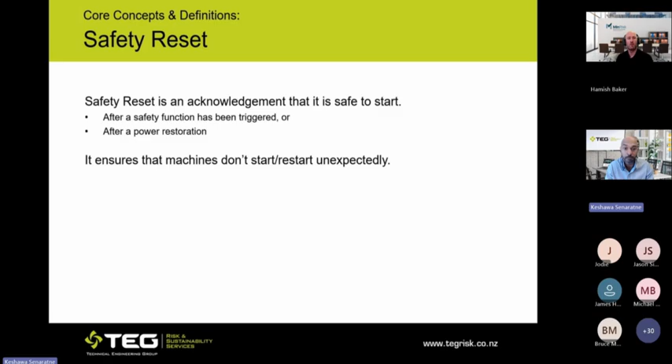In terms of unexpected restart, AS/NZS 4024.1603, which is the ISO 14118 on prevention of unexpected restarts, or unexpected startups actually, talks about definitions and key considerations. If I were to highlight this: unexpected or unintended startup, as per the standard, is startup which, because of its unexpected nature, generates a risk to persons.

It can be a start command that results from a failure, an unintended start command, or even external influences such as gravity, load holding, failure of load holding, and so forth. It does not mean automatic cycling as part of a process function. That's intended, that's considered normal operation. We're purely discussing restart after a safety function or a hazardous situation or a power restoration.

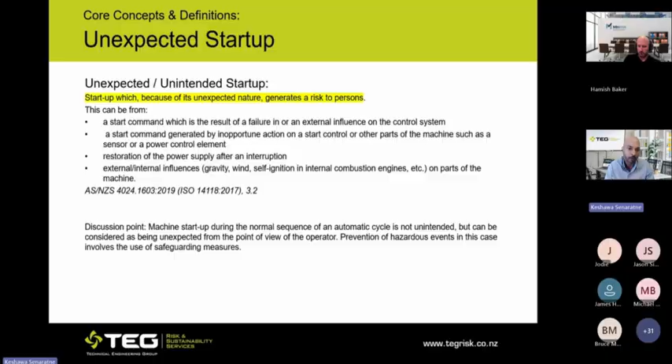So if we go further into this topic, then the unintended start command or maintained stop command both come into play. It's not purely on things starting to move. Prevention of unexpected startups could be looked at in these lights, and this is just bringing some awareness for consideration.

And probably one thing I'd say is it's quite a technical topic, and Casey and I had a bit of discussion around whether we could actually fit this into one webinar. There's going to be a balance between those that are technical, designing these things, who might be diving deeper into these standards, and others, perhaps in health and safety manager roles, where we'll just draw your attention to more systemic, high-level things. There'll be a lot of references here, and you'll get a copy of the presentation afterwards to do a deeper dive into some of these clauses.

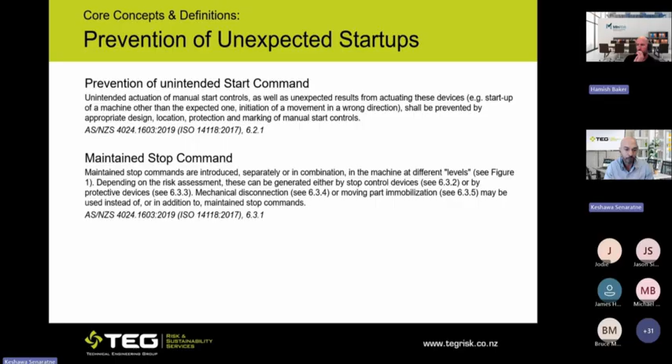Yeah. Thanks, Hamish. So hence I won't go into all of this. You're able to read through them in the presentation. Start interlock and restart interlock are less commonly brought up topics. They come out of the ESPE standards, electrosensitive protective equipment standards. It's basically talking about machine start and automatic restart, so the controls that need to be in place to prevent exposure to hazardous situations.

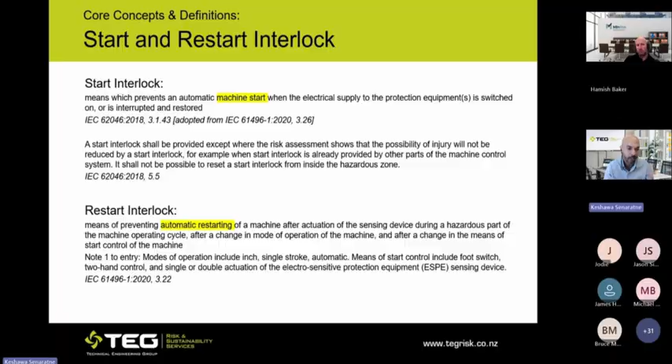And that earlier comment I made, those IEC references that Casey has given relate to electrosensitive protective equipment. It's getting right down to the weeds, so it's probably a more technical reference for some of our machine builders and designers to look into. Yep. And as Hamish said, this is building up a broader picture of what you may need to consider when you're preventing unexpected startups or designing equipment to achieve that.

Manual resets, coming out of ISO 13849. This is the exact clause from the standard. It first talks about re-establishment of the safety function by resetting the safety guard that cancels the stop command. That's inferring that reset is intended to cancel the stop command if indicated by the risk assessment, which I will go into in more detail later. This cancellation of the stop command shall be confirmed by a manual, separate and intended action, which is a manual reset.

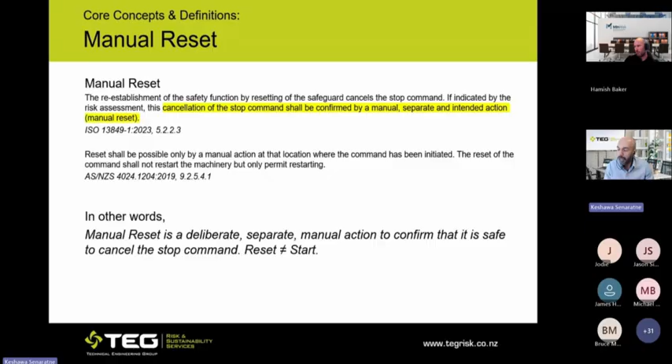And I've pulled in some reference from 4024.1204, which is the IEC 60204-1 equivalent. Reset shall be possible only by a manual action at the location where the command has been initiated. So this is referring to visibility and line of sight requirements. The reset of the command shall not restart the machinery, but only permit restarting. So in simpler terms, manual reset is a deliberate, separate manual action to confirm that it is safe to cancel the stop command. It's not a start. Reset is not a start button. So yeah, things to consider.

They're later versions, updates at an international level, and particularly machine builders, designers, or those specifying, if you want to be applying the latest available knowledge, you may want to consider using or referring to these latest versions. But if these standards don't look familiar or look out of whack, variations of these older versions are represented as part of the 4024 series. Sorry, Casey, there you go. Thanks.

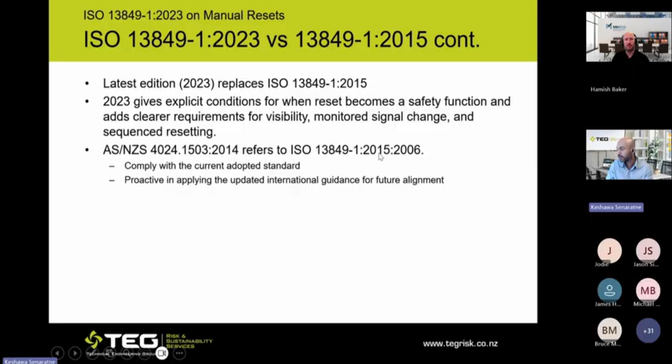So let's dive into some of these specifics. For some of the design considerations, I've just picked some of the common themes here. So this discussion around the reset device. Not necessarily on the reset device, but from a design standpoint, it talks about providing a cancellation of the stop command as a separate, manual, intended action. So a separate reset button is typically used to confirm a safety reset.

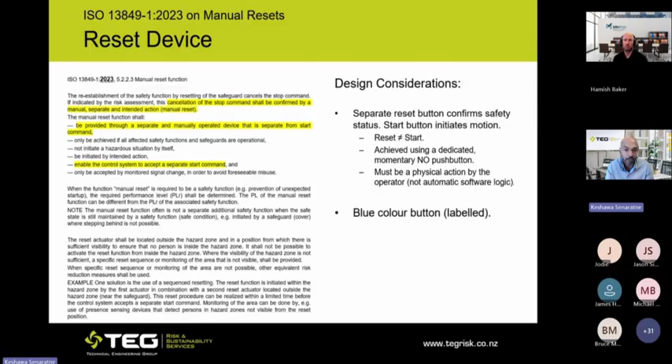You would generally come across a blue button, which is typically what we use, and the requirement for the blue color basically comes out of 4024.1204. It talks about different colors for different purposes, and that's just to make sure things are standardized and common throughout the industry.

So a reset is not a start button. It's achieved using a dedicated momentary, usually normally open, push button. It must be a physical action by your operator, not automatic software logic, meaning it's not an automatic reset.

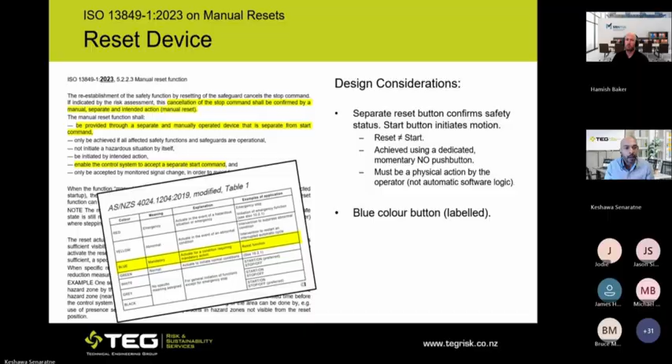The reset function should also only be achieved if all affected safety functions and safeguards are operational, meaning before you're allowed to actuate a reset, the protective measures must be active and ready. Also, initiating a reset shouldn't lead to a hazardous situation by itself.

So for design considerations to achieve that, the reset button should be inhibited if the safety inputs or feedback signals indicate a fault or open condition. For example, if your guard door is open, your reset button shouldn't work. The reset button only becomes active when all conditions are met, meaning your interlocks are shut and your EDM comes back and says it's okay.

One of the best practices would be to use combined controller logic, say a safety OK signal that would enable reset. One of the pitfalls is that you have a whole array of different input devices, light curtains, interlocks, and so forth, but in your program you might actually miss one or some of them. So a good practice is to combine all of that into a single safety OK signal.

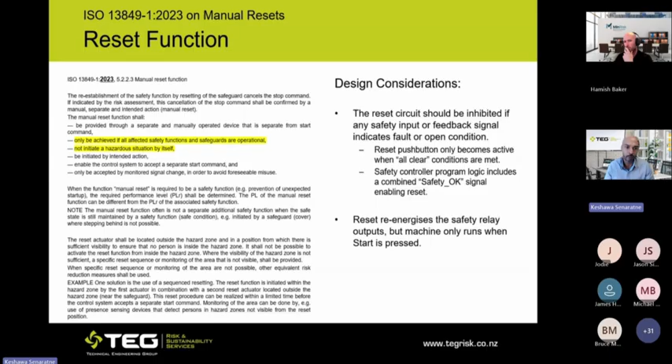There's discussion around foreseeable misuse and fault detection. So this is actually an additional clarified item in the latest 13849-1. It says only be accepted by monitored signal change in order to avoid foreseeable misuse. So it's very sort of prescriptive. Some of the design considerations is basically what it's saying is you're monitoring a state change of your reset.

So a rising edge and a falling edge, meaning a button is pressed and released. Something to consider is before you look for the high or rising edge, you should see a low, meaning the reset button has not been pressed, and it's pressed and then released, going back to a low.

There's additional things such as timing interlocks you could introduce. So some of these specifics are coming out of standards like IEC 62046, application of protective equipment to detect the presence of persons. So they're somewhat providing some guidelines as to what these timing interlocks should look like. So between 150 milliseconds to 4 seconds to look for that rising and falling edge.

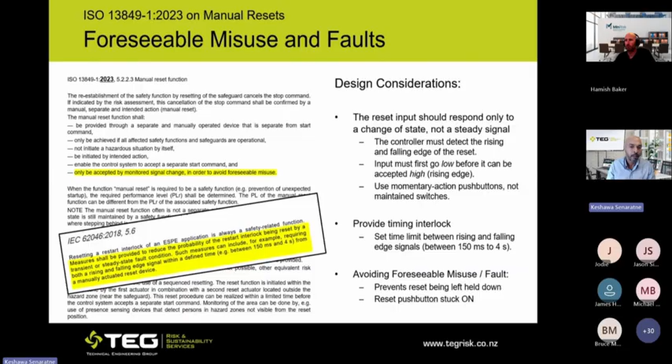We do come across even safety relays from established manufacturers that aren't capable of detecting a falling edge, which is somewhat surprising, and there are things out there, so things to consider. And adding on to that, they're looking for the hold and release for things like if somebody's leaning against the reset button, it's not a deliberate action. So these are things to sort of capture that.

One of the key things for overall manual reset is the reset location and line of sight. So in order for somebody to acknowledge that the area is clear to now restart the machine, is to be able to see from the reset location.

We typically find these reset buttons where you can't really see through the guards to, say, the other side of the machine, or you can basically disappear through the guards and people can wander around. It could be inside perimeter fence guarding, and there could be multiple people now attending inside a hazard zone. And a line of sight is specifically important to make sure that somebody else couldn't close the guard behind you and restart the machine, leading to a very dangerous situation.

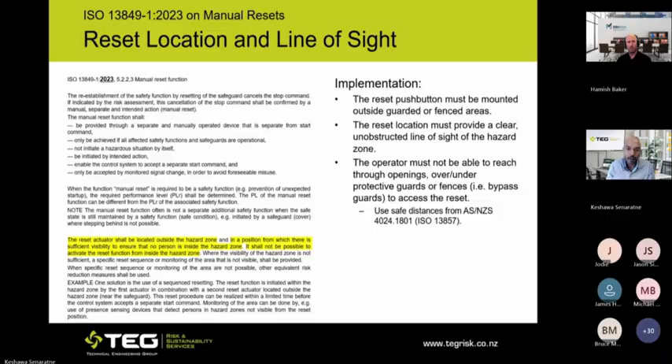So this is one of the primary and key requirements, and you'll see that if you cannot achieve a line of sight, then there's various other requirements. So one aspect of that is leading into sequenced resetting. So we're talking about multiple resets. One could be a first reset in a location where you can clearly see the area is clear, and then you come back and reset the master.

And there could be timing interlocks based on your risk assessment. If there's a possibility of unexpected startup or a second person being in there while the reset is done from a remote location, then there could be timing interlocks to say between the two reset buttons, it needs to be done within a certain time duration, otherwise it'll time out.

Or it could be a logic sequence, say guard 1 is okay, guard 2 is okay, the area is clear, acknowledgement, and then the reset button. So if you don't see that order of things happening, then you can't reset.

The 13849, also especially the latest standard, elaborates a bit more on using alternative protective measures, such as presence sensing, like laser scanners in areas where, although you're walking into the zone through a guard door, interlocked guard door, areas where you don't have line of sight could be protected by a laser scanner.

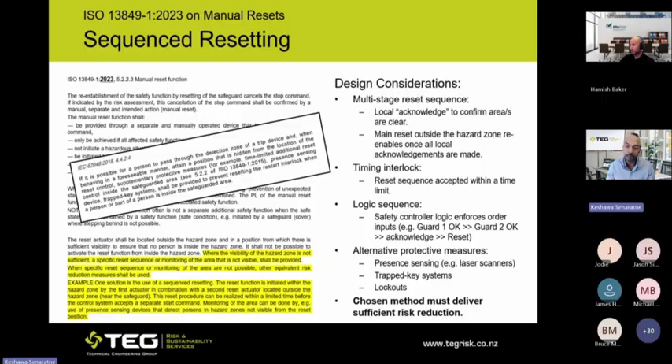So there are other standards that build on this concept to prevent exposure to unexpected startups. And a final note here is a chosen method must deliver sufficient risk reduction. So that comment there leads into the next, which is a somewhat misunderstood element of reset design.

The latest 13849 really builds on this point where the reset becomes a safety function. So typically, there's that note down here saying the manual reset function often is not a separate additional safety function when the safe state is still maintained by a safety function. Example, initiated by a safeguard cover where stepping behind is not possible.

So, if you're opening a small interlock guard cover, you can't hide behind it. Your arm or whatever reaching through that opening would prevent the guard from closing. Your hand or part of your body is in there. So in that instance, manual reset initiating unexpected startup is almost of negligible risk, because your interlock safety function is what's protecting you from unexpected startup.

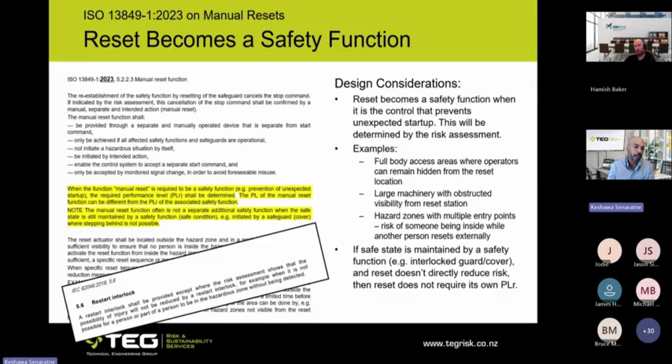There's additional things on reset becoming a safety function. I found this in an ISO standard associated with presses actually, and it actually prescribed that your safety system reset needs to be the same as the safety function on which it is acting. So say if it's an interlock guard that's preventing your access into the press area, then it needs to be the same performance level, I mean, the same level of safety integrity as your primary safety function.

And I think this probably just highlights the point that we've raised in prior webinars or other sessions we've delivered, where you've got those hierarchy of standards documents, and 13849, which is the same as 4024.1503, is the design of functional safety circuits. It's a design principles based document. But there may be very, very specific machines, like a press, for instance; things like robots have got very specific requirements.

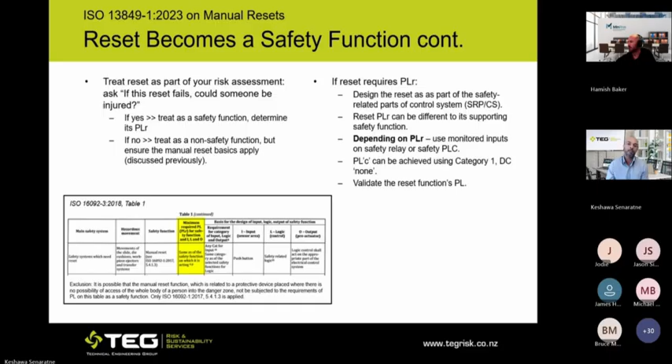By having a physical button, it's more of a deliberate action. It's more robust and less prone to accidental activation because of various basic, fundamental design principles. Edge detection: this is electrical edge detection, rising edge, falling edge for a button press and release, versus a logic bit inside the software. So it's a bit more robust.

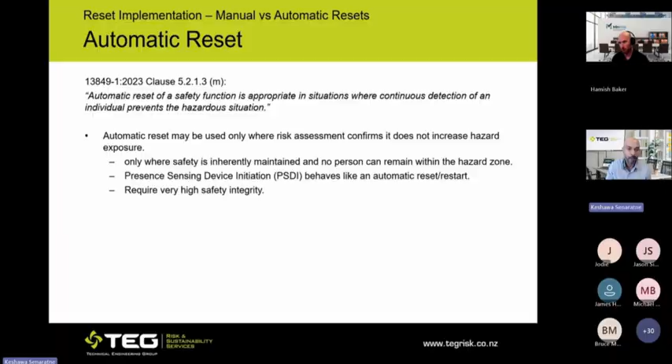Automatic resets. Yeah, the automatic reset of a safety function is appropriate in situations where continuous detection of an individual prevents the hazardous situation. So it leads back to the risk assessment. If the risk assessment confirms that it does not increase hazardous exposure, then it is possible, especially using things like presence sensing device initiation (PSDI). I have some example here, but you will see there are some issues with this.

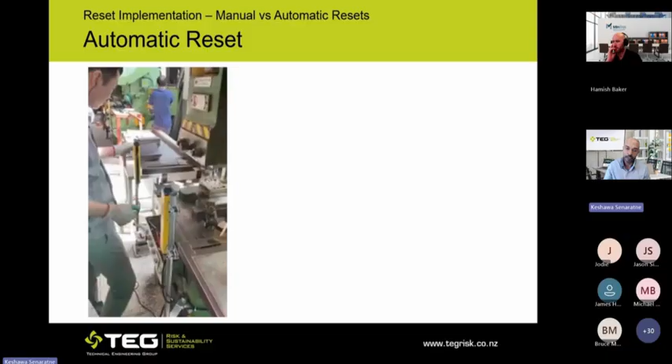So this guy is operating through an automatic reset. I think he is using a foot switch as well. But the issues you might be pointing out already are that everything is wide open. Although he's putting his hand through here, he can also put his hand outside of this detection, or the light curtain, or under the light curtain.

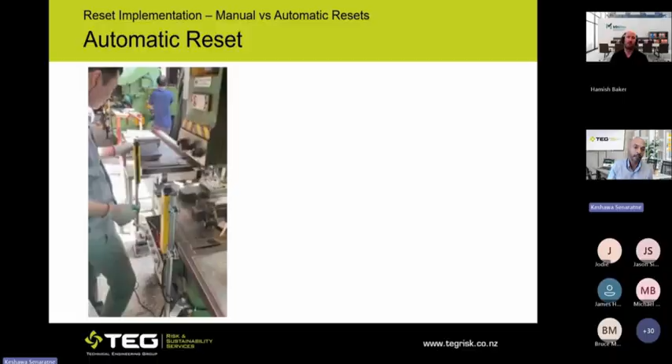So this is possibly an option where you might be able to use an automatic reset type of setup, where the hazard zone is fully enclosed, and you cannot physically get in there, and you cannot be behind the protective devices for it to operate.

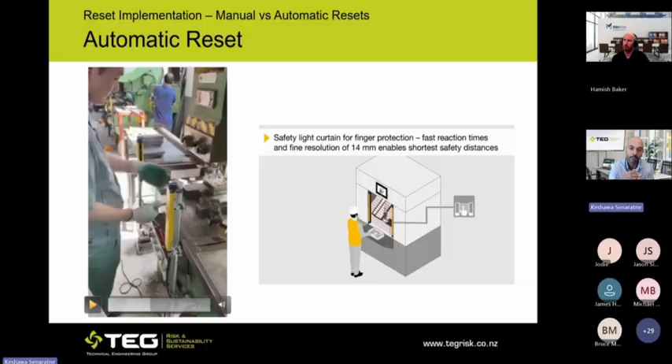The other things to consider are your reach in, reach through, reach over, reach under distance, including the resolution of your protective device. Say you cannot put your hands through the light beams, and also things like the stopping times. So if you push your hand through, can the moving parts stop quick enough for it to not cause any injury? So there's quite a few things to consider there.

I think we're right on time there, Hamish.

So some of the key takeaways. If I were to summarize, reset is not a start button. A reset is what enables you to start the machine. Manual reset is essentially a default option versus digital and automatic resets. Physical resets are preferred. Reset must be conditional on safety status. So your protective devices must confirm that it's safe to reset and then restart.

Visibility of the hazard location is key. So if there's a risk of unexpected startup, and if your reset is the one thing that's stopping that, then the reset button needs to be a safety function based on the risk assessment.

And some of the common pitfalls are the use of the same button for start and reset. Often HMI fault clear is used as a reset input. Automatic reset after power restoration, that's potentially a big risk item, very rarely discussed. Reset within reach of the hazard zone, so without visibility.

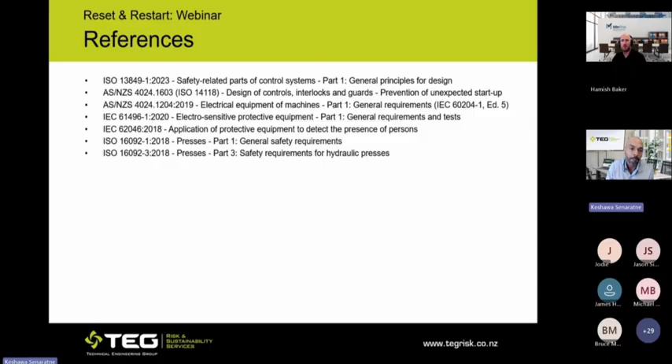So I think that's pretty much it. These are some of the references I've used, and there's a lot more to research than that. Okay, a couple of questions. Thanks, KC. Yogesh, I think we've got a question here.

Would a SCADA reset be considered part of a physical or digital button? I'm assuming you mean SCADA on an actual screen, if that's what you mean, Yogesh. So did you want to touch on that, KC? Yeah, going by a SCADA reset, I would say it's digital, and it's coming back to that physical versus digital.

I would prefer to use a physical button, but say you have a large factory and you have multiple resets, you've got sequence resets in place, your local specific acknowledgements need to be of higher safety integrity than your final safety reset, because your localized resets are what confirm that the area is safe to start. So I think it's somewhat subjective, but in essence, I feel like it's more of a digital reset as opposed to a physical reset. So if it's possible, I would prioritize providing a physical reset button.